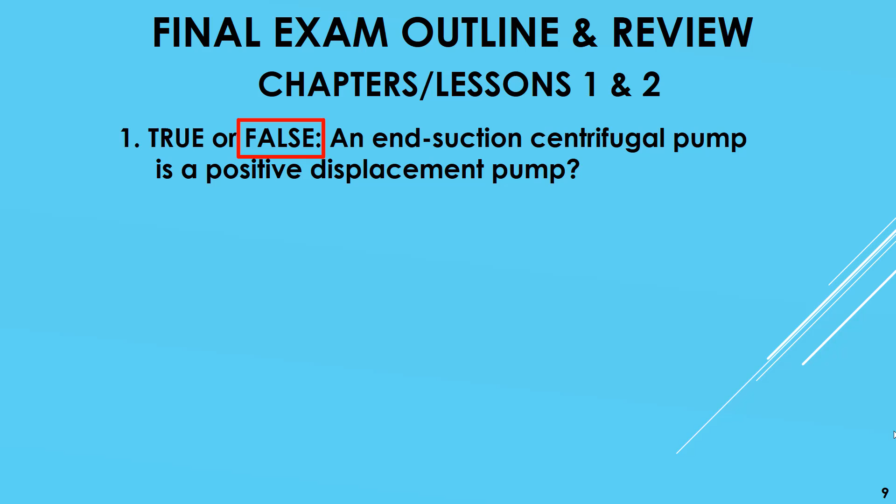Let's do a little review. So true or false, an end suction centrifugal pump is a positive displacement pump. True or false? This is from our lesson 1 and 2. Anybody? The answer is false. So an end suction centrifugal pump is not a positive displacement pump. Not.

Question from lessons 3 and 4 from our textbook. The life expectancy of a bearing can be determined from 4 pieces of data. Please circle all the answers below that apply. We have load, speed, temperature, environmental conditions, all of the above. So the correct answer is all of the above. The life expectancy of a bearing can be determined from 4 pieces of data. And that's the load that's on that bearing: axial load, radial load, thrust load. The speed is the RPM, revs per minute.

We had somebody ask me that question. Revs per minute is speed. And temperature, what are we operating at? What is the temperature that that pump is heating up to? And then the environmental conditions. Is it a clean environment, a filthy environment? Is it a wet environment? All those play into the life expectancy of a bearing on a pump.

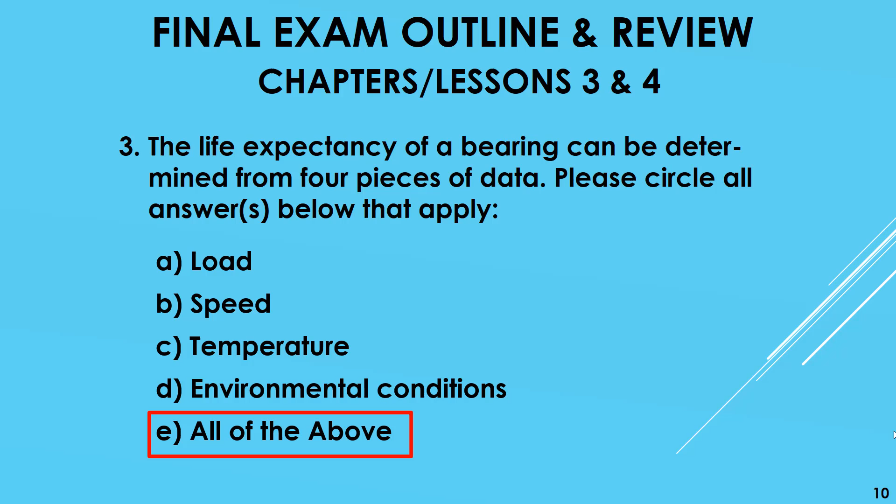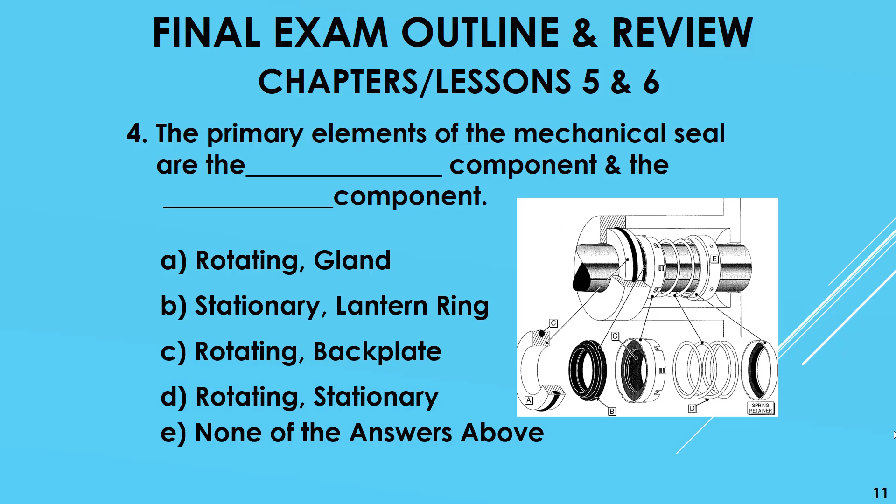From lessons 5 and 6, the primary elements of a mechanical seal are blank components and blank components. A is rotating, gland; B is stationary, lantern ring; C is rotating, backplate; D is rotating, stationary; and E is none of the answers above. The correct answer is rotating and stationary. So the primary elements of the mechanical seal are the rotating component and the stationary component. So typical question that could be on the final exam, per what we've studied in the past on our homework, lectures, quizzes and textbook.

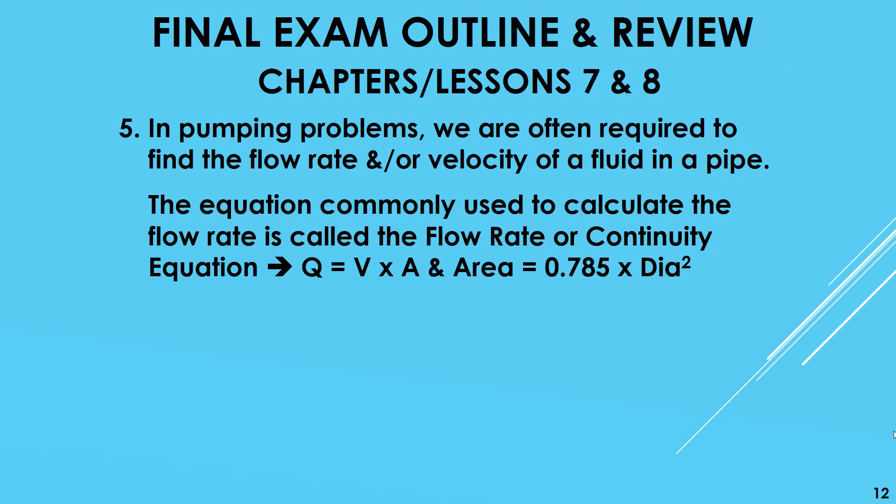From lesson 7 and 8, in a pumping problem, we are often required to find the flow rate and/or velocity of a fluid in a pipe. So here's a typical standard flow rate problem. The equation commonly used to calculate the flow rate is called the flow rate or continuity equation, where Q, flow rate, is equal to the velocity of the fluid times the area of the pipe, and area is equal to 0.785 times the diameter of the pipe squared. So that 0.785 is 3.1416 (pi) divided by 4.

Find the flow rate in a 10-inch diameter pump's discharge pipe if the velocity is 12 feet per second. So what are we trying to do? We're trying to find Q, the flow rate. So find the flow rate in the 10-inch diameter discharge pipe.

So Q is equal to V times A. We have 12 feet is the velocity. Velocity is shown here. This is the velocity times the formula for the area of a circular pipe, 0.785 times the diameter squared. And there's our diameter, the 10-inch diameter is there.

So what is the flow rate discharging from the 10-inch diameter pipe? We can cancel out units. So the flow rate Q is equal to 6.54 cubic feet per second. And notice I didn't ask you for the units, so we just cranked it out in cubic feet per second.

But be aware that on a quiz or on the final exam, if I say I want the flow rate in gallons per minute, you'll have to convert that. Since I didn't ask you, we just cranked it out in cubic feet per second. So the flow rate in a 10-inch diameter pipe with a 12 feet per second velocity is equal to 6.54 cubic feet per second.

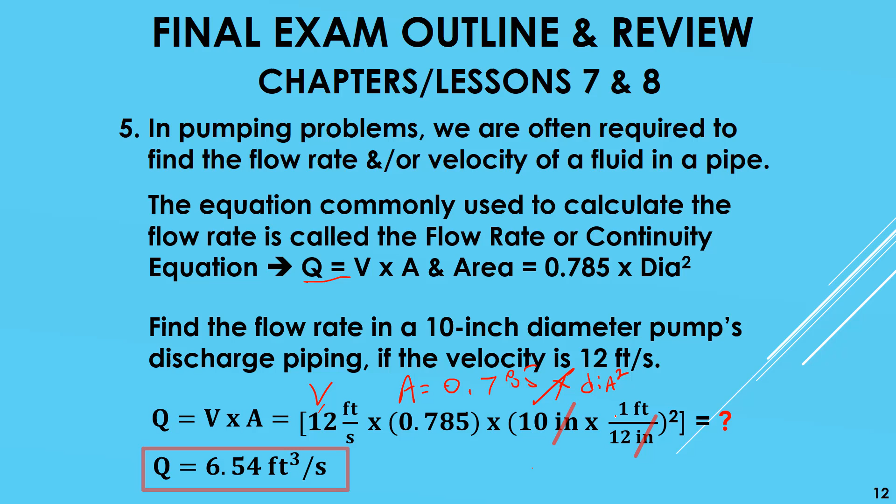Find the water horsepower of a centrifugal pump with a flow rate of 200 gallons per minute and a total dynamic head of 130 feet. The density of the water is 8.34 pounds per gallon, and the specific gravity will always be 1 for water.

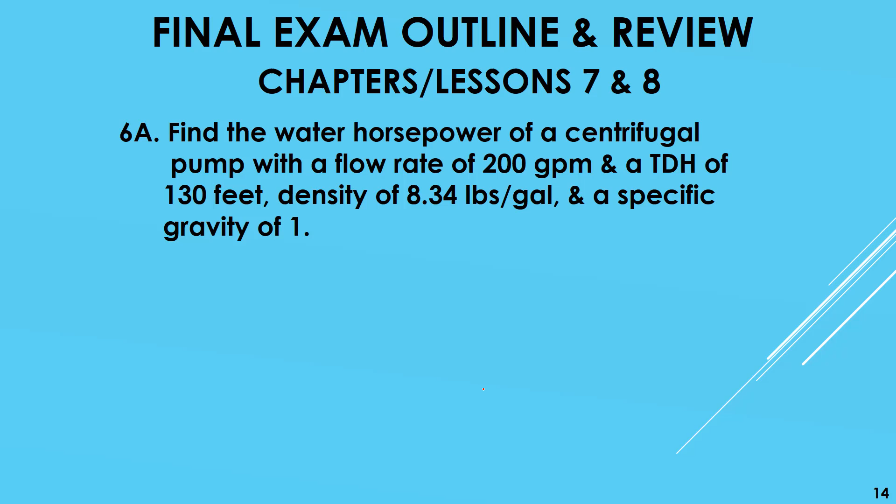So we use that equation just to clean it up and not have to worry about the density of water. That 8.34 just adds another probability of error as we type numbers in our calculator. We can make a mistake. So find the water horsepower of a centrifugal pump with a flow rate of 200 gallons per minute, total dynamic head of 130 feet, density of 8.34 pounds per gallon, and a specific gravity of 1.

So we use the second equation to find the water horsepower. We'll plug everything in the equation. The first number is the total dynamic head, the TDH here. This is Q here. We have our specific gravity here.

And then we have the standard conversion factor in the denominator. So a lot easier to use that second equation. Don't have to worry about density. So we have 6.57 horsepower units.

So find the water horsepower of a centrifugal pump with a flow rate of 200 gallons per minute and a total dynamic head of 130 feet with a density of water of 8.34 pounds per gallon and a specific gravity of water of 1. The water horsepower is 6.57 horsepower units. So that's a theoretical value. That's an idealized value. It does not exist in the real world.

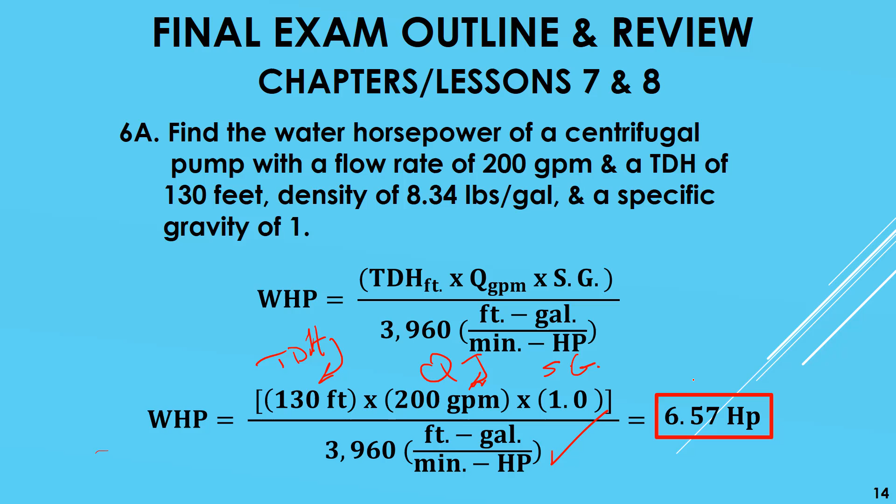This is the first value we need before we can crank out the brake horsepower. We can crank out the electrical horsepower. So we need this guy before we can move forward on our next calculations.

Find the brake horsepower of a centrifugal pump with a flow rate of 200 gallons and a total dynamic head of 130 feet and a specific gravity of 1. Now I'm giving you the mechanical efficiency or inefficiencies here with that 80%. So right here, we're going to use the brake horsepower equation, which is the same equation as the water horsepower equation. The only difference is now we have the inefficiencies of the mechanical factoring in the denominator of the equation, and that's shown right here. Same equation as the water horsepower. Now we're dividing by that mechanical inefficiency.

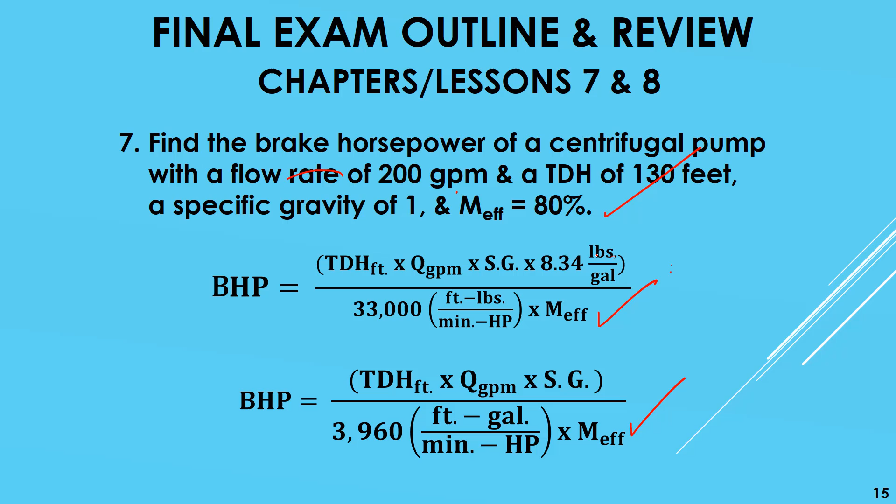So we plug everything in the equation. The brake horsepower is equal to the total dynamic head. Basically, it's a lot easier to use the second equation. Sorry, I jumped a little bit ahead. It's a lot easier to use the second equation to find the brake horsepower because we don't have to worry about that density term as shown here in the denominator up here. This guy. Forgive me, we have to worry about this guy. So it's a lot easier to use the second equation to find the brake horsepower, and that's the one we're going to use.

We're going to use that second equation. We're going to plug everything in it, and there we go. We get the brake horsepower using the second equation, not the first equation. The first equation is valid, but it's a lot more cumbersome to use. So the brake horsepower, if we have a centrifugal pump with a flow rate of 200 gallons per minute and a total dynamic head of 130 feet and a specific gravity of 1 with a mechanical inefficiency of 80%, is 8.20 horsepower units. So what's that telling us?

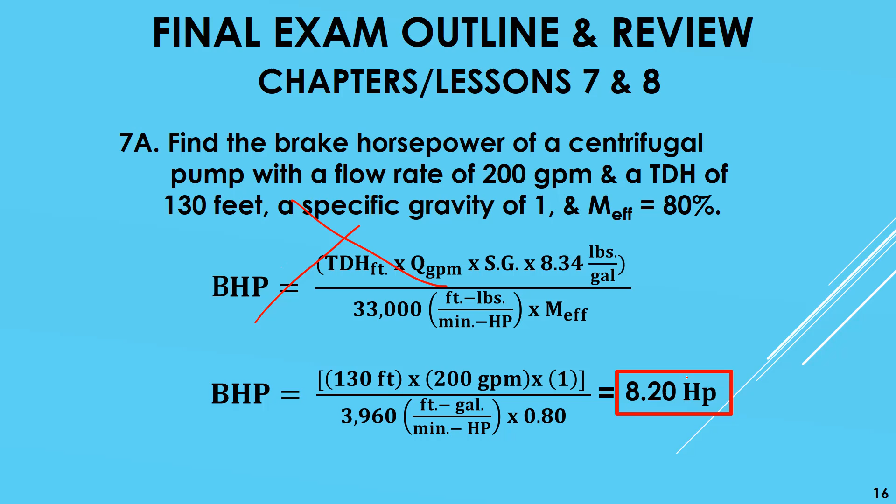It's telling us that the water horsepower was smaller than the brake horsepower. The brake horsepower is getting bigger, which is in the correct succession. The water horsepower should be the smallest value as we're doing our calculation to crank out the horsepowers. The brake horsepower has to be bigger than the water horsepower, so we're in the right direction.

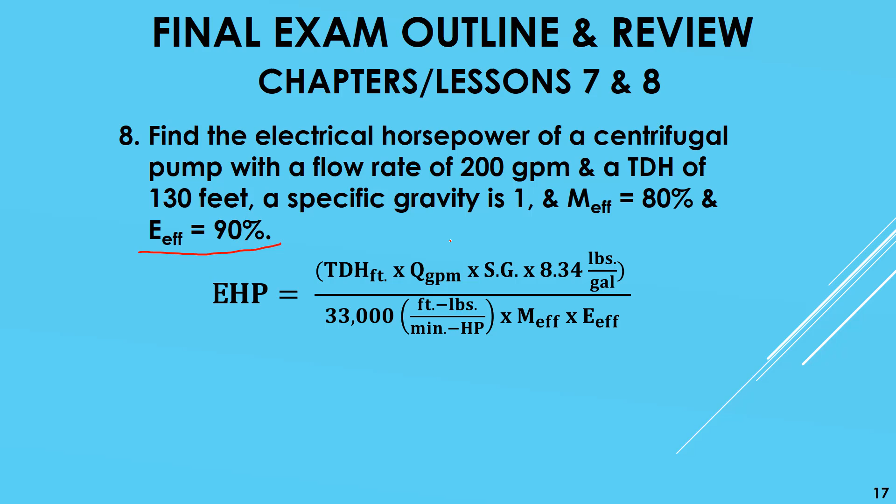Now we're going to find the electrical horsepower of a centrifugal pump with a flow rate of 200 gallons per minute and a total dynamic head of 130 feet, a specific gravity of 1. We have the mechanical inefficiencies, and now we're factoring in the electrical inefficiencies to find the electrical horsepower. So once again, we could use that old ugly equation, but I prefer us to use the more simplified equation. Same equation as we found for the brake horsepower, except now we're factoring one more inefficiency, and that's the electrical inefficiency from the motor. So we'll do our calculations again.

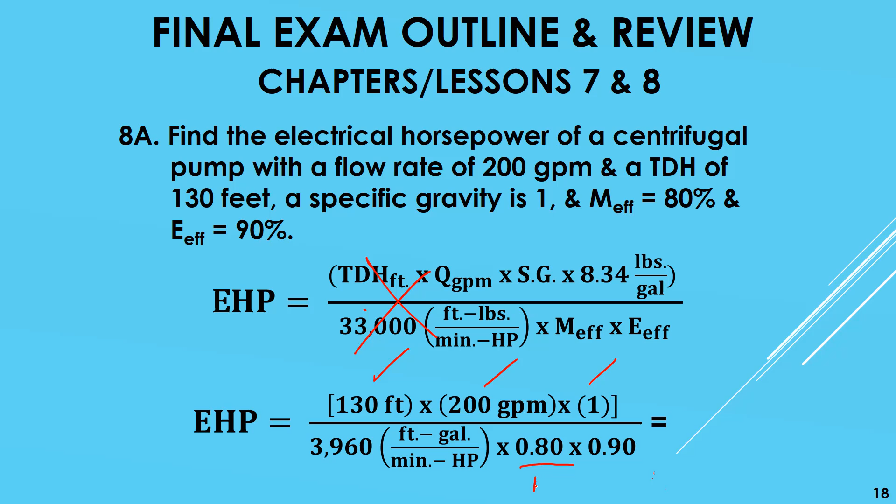We can use that equation, but that equation is cumbersome. It will work for us, but it's just more cumbersome to use. So we'll use this equation here. This equation is, once again, the electrical horsepower. Same equation as the water horsepower. Everything's the same, except we're factoring in two inefficiencies for the electrical horsepower. We're factoring in the inefficiency for the mechanical, and we're factoring in the inefficiency for the electrical motor.

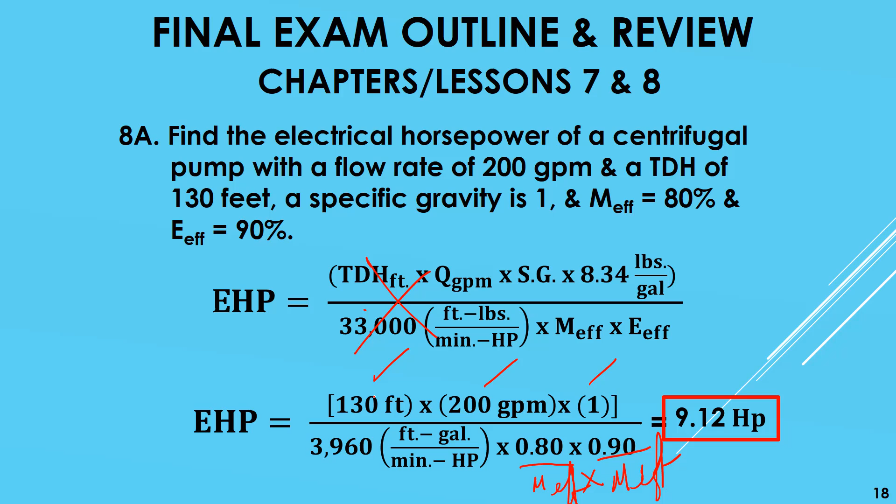So now we can crank out the electrical horsepower, and it's got to be bigger than the mechanical horsepower, and yes, it is. It's 9.12 horsepower units. So we know we did our calculations in correct succession because everything's getting bigger. I'm not going to guarantee it's 100% correct because we made a little typo when we're plugging in our numbers in our calculator, but at least we know we're going in the right direction with our calculations.

Then the electrical horsepower has got to be bigger than the brake horsepower. So we did our calculations. We came up with the water horsepower on the previous slides at 6.57. We came up with the brake horsepower, which has got to be bigger than the water horsepower, at 8.20 horsepower units. And then finally, the electrical horsepower calculated at 9.12 horsepower units.

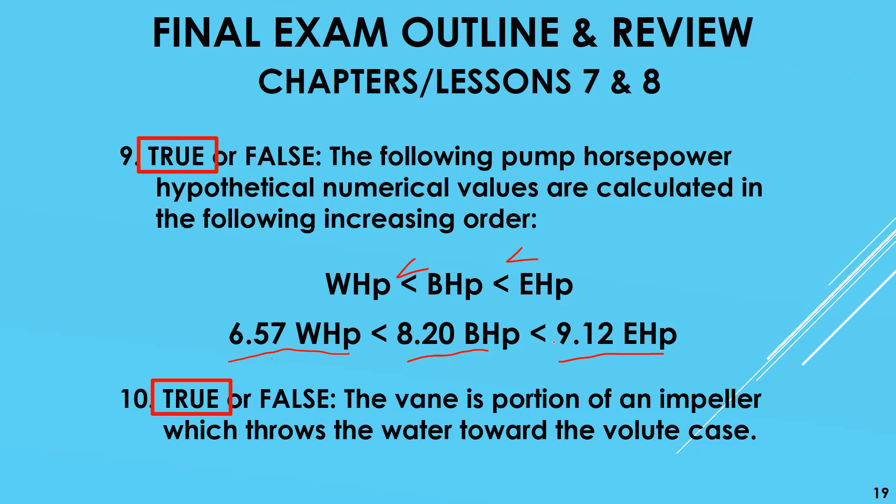So we know we did our calculations theoretically correctly, hopefully without making any numerical value errors typing our values in our calculator. So it's true. Yeah, it's got to be true. That is correct. True or false, the vane is a portion of an impeller which throws the water towards the volute case. That is true.

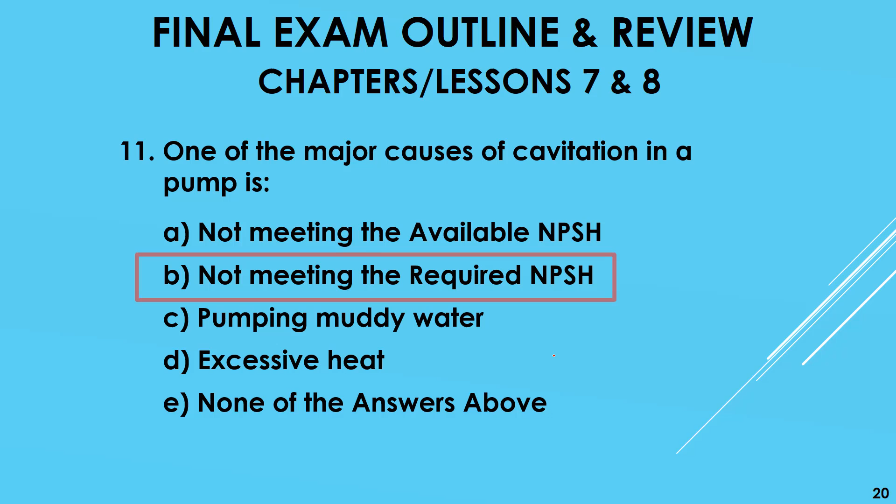7 and 8 lessons. So one of the major causes of cavitation in a pump is: not meeting the available net positive suction head, not meeting the required net positive suction head, pumping muddy water, excessive heat, none of the answers above. So we talked about cavitation, which is a phenomenon that basically tears apart our pump volute case and impellers, and cavitation also plays a part in destruction of valving. So the answer is not meeting the required net positive suction head. That will create the high probability that we're going to have a cavitation issue in our pump and our pumping system.

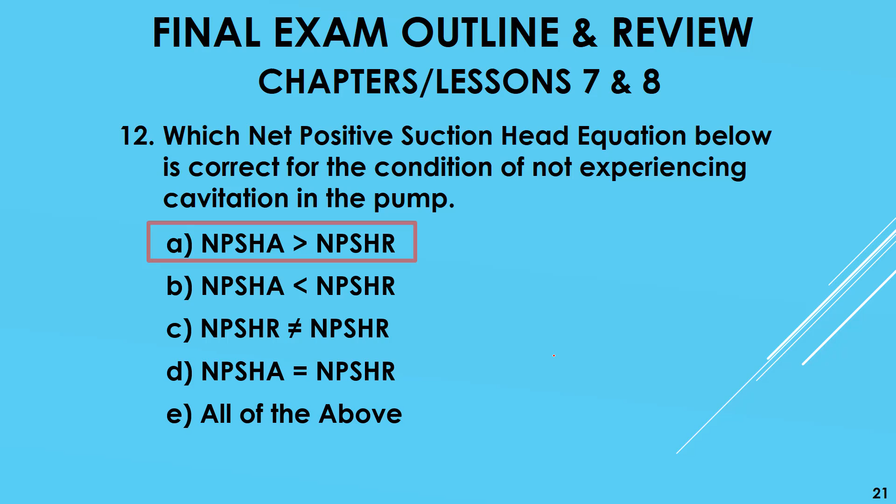And I told you before that the book says equal to or greater than. We never want it to be equal to. We need to have some flexibility, a factor of safety. So we like to say when we do our calculation that the net positive suction head available should be a minimum for water 5 feet above the required net positive suction head per the manufacturer's recommendation, and for wastewater should be a minimum of 7 feet above the net positive suction head required per the manufacturer. So that gives us a factor of safety, so that we know we're not going to be right on that line of probability of cavitation with our pump.

Last comments and updates. I'll be available to answer questions or to clarify anything that might be unclear. So I'll be available to help you in any way possible to prepare for your final exam or to answer any questions. I would use your study time wisely and efficiently in studying for your online final exam. I would review past quizzes and homework sets in preparation for your final exam. I would take the practice final exams as tests to see if you are ready to take your final exam.

So I made a practice final exam, 50 questions from all our lesson plans. So I just pulled 50 problems from everything we've covered over the semester. I made a final practice exam for you to utilize your time wisely. Take the practice exam. You can kind of see your weak areas to go back and review before you sit and actually take the final exam, which is a one-time opportunity to take.